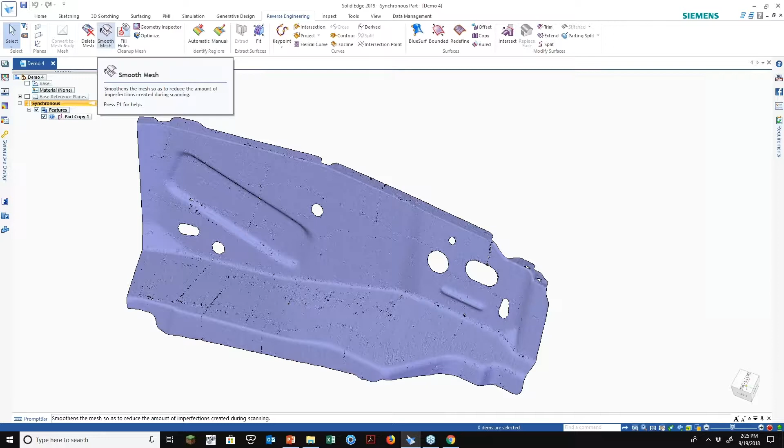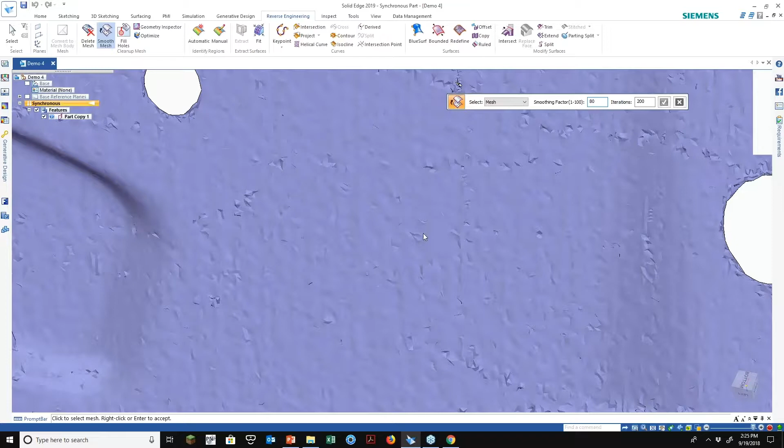So let's just grab a rough area right here and just window around it. Let's say we want to smooth that area right there. And we have this little slider bar that allows you to tell it 1 through 100. You can run the mesh over and over and over again on the same area. Mesh does the entire part at one time, but let me do a window.

I want to do a mesh facet. So it's not the computer, it's actually the user behind the computer. So I want to go facet. I want to pick individual facets to smooth as opposed to the entire geometry to start with. Now I'm getting the checkbox so I can adjust this, which is what I was looking for a second ago.

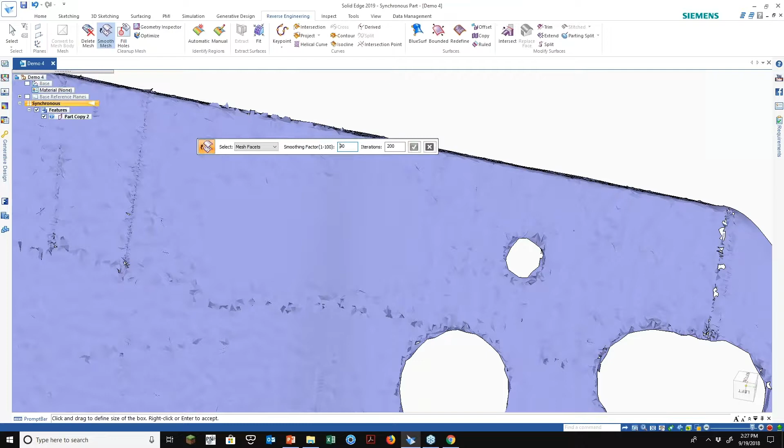All right, so let's go down to 90 and run that. Oh, there we go. Takes a second. All right, now we can see the difference in the two surfaces. So let me rotate this on the side more. There we go. So this is the unsmooth surface, and this is the new smooth surface.

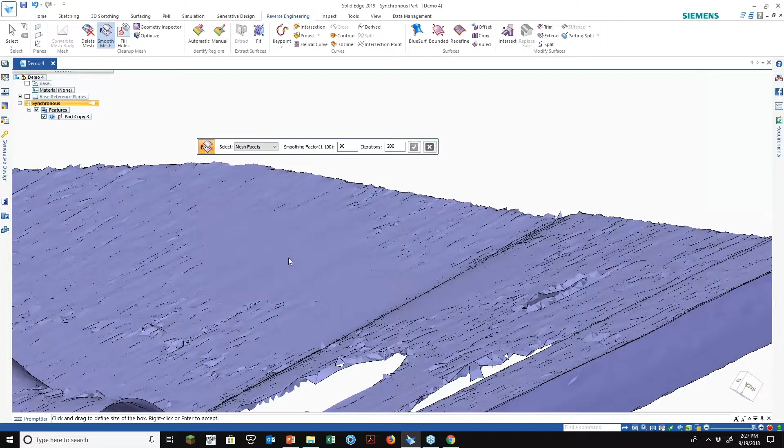So let me just run that one more time right here on mesh facets. And we'll see if there's any open areas. And you can run it over and over again. So that smoothed it out pretty well. You can just keep running it over the same area as many times as you want. Eventually, you could deform the geometry to the point where it's not usable by smoothing it over and over again. All right, so that looks pretty good.

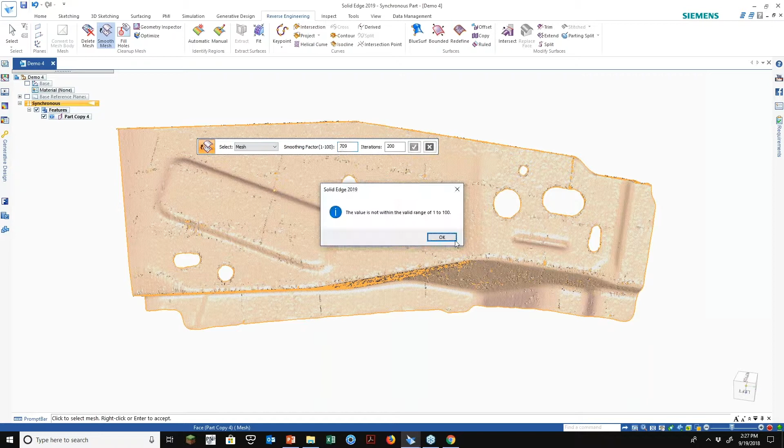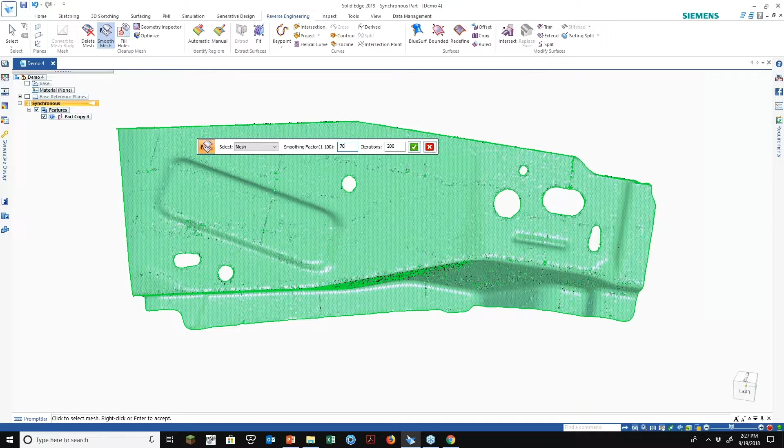Let's go ahead and just tackle this. Let's see if we can do the entire thing. Pump that down to 70. Oops, not 709. Set the mesh. Hey, there it goes. Did it. All right. Now let's take a look at the geometry. Much smoother. So we took a lot of the irregularities out.

Obviously, a lot of the hole cleanup we need to do to get that right. And there's some areas with some small little pinpricks in here. Again, we have some tools to kind of deal with that. This came from the last release where we can actually delete mesh. Same kind of way where we can actually paint the mesh facets and do a box or

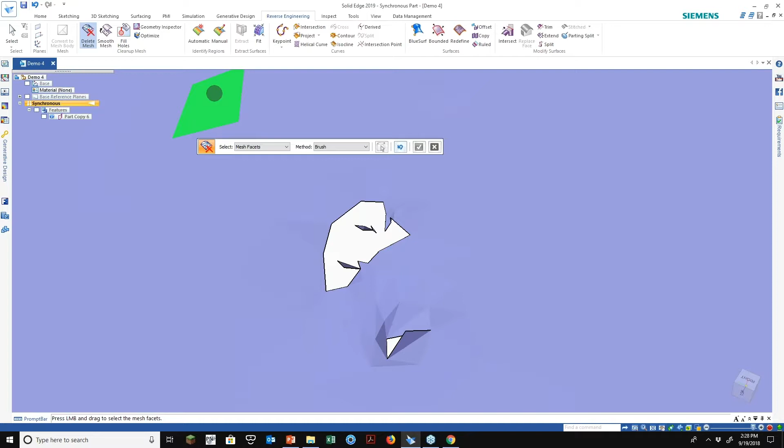brush where you can kind of window and just drag around and delete some of these areas out of there to clean up. Then you can go back and actually patch some of these holes up to fill them in. All right, so that is the new smooth tool inside of 2019.